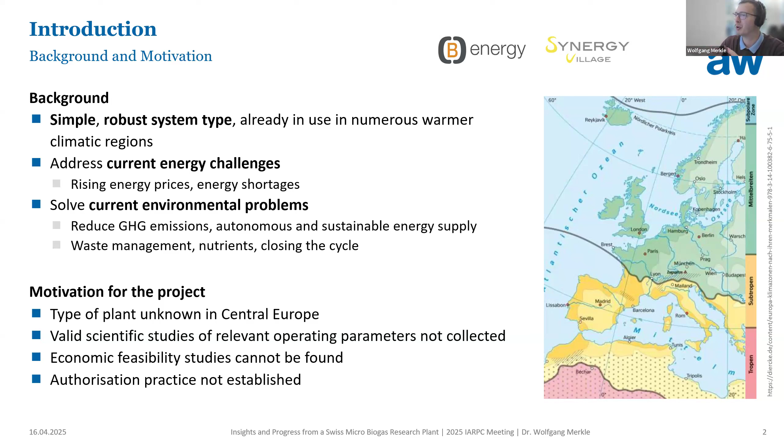So now the company is thinking about having one central station with mono incineration to burn all the sewage sludge, and then they're building big mountains of ash. At some point they will have a leaching process to get the phosphorus out of these mountains, but while the incineration plants exist, the leaching process is not done yet. So that's not really landfill, but it's still building hills and dealing with this later.

The motivation for us was that this kind of plant is already used in a lot of different warm countries, like China or Africa. But we don't know if we could use this kind of system in colder regions, like Central Europe - probably we have to adjust these systems.

What we also have is a lack of data. There are millions of these plants, but nobody is measuring anything - they just see if the burner is working or not. That's the only measurement equipment they have. They know the gas quality, if there's enough methane inside, but normally they're not measuring. That's why we want to have a scientific study to really measure different temperatures, pH, redox, gas amounts, gas quality, and all this stuff to do a balance later for the energy.

And for the economic feasibility studies, you also don't find a lot of information about that, especially in Central Europe, where there are none of these businesses.

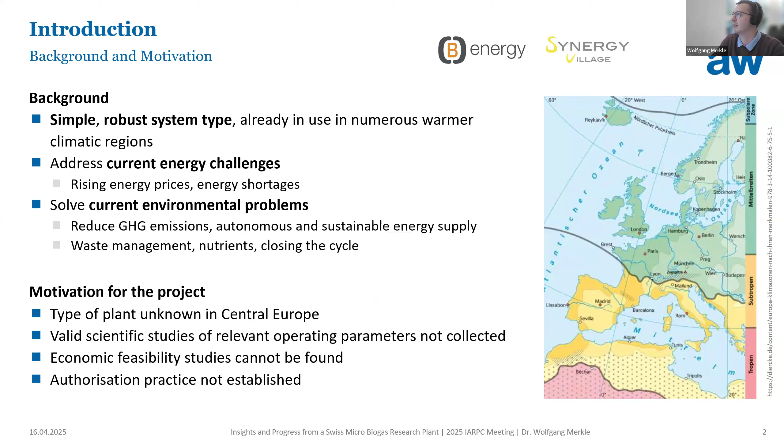And the big thing is, technically everything is possible, but for sure the authorization practice is always lagging behind, because when you don't have this kind of system yet, there's no law or regulation. It's always like this - first you have something new, and then the regulation comes later, because before they never had to deal with this kind of thing.

So this was the motivation, and what we want to do in this project, which runs for 2 years, is to analyze the performance once we operate these kinds of plants. Then also to measure the economic viability, and figure out the permission - what do I have to do to get this thing running, and what kind of offices I have to call, and who is deciding if I'm allowed to do this or not.

And for sure we also do some meta studies where we want to look at how we can use this kind of system for regions which are really far away from the grid - for example the Alpine region - and see what kind of possibility there is to use this kind of system. So these are, plus minus, the working packages we are dealing with.

So the first thing was to construct and plan such a thing. Then for sure the operation, which we're doing now for 200 days already. And for sure, when we did the construction, we had to adapt the normal system you can buy on the market to the conditions we have here, putting a lot of different measurement equipment inside to do the scientific research and also get practical experience - because when you're doing it scientifically, you would say, okay, you're feeding it three times a week, for example.

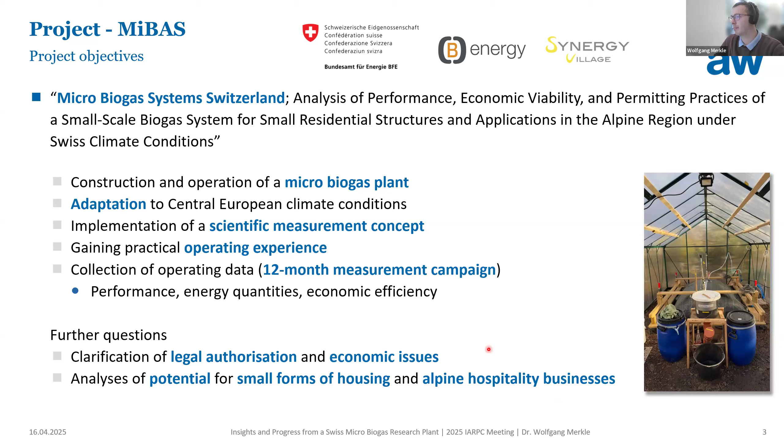The project started in December 2023, and we have different partners. We are from the Zurich University of Applied Sciences, Institute of Chemistry and Biotechnology, but we also have colleagues from another institute, Natural Resource Sciences. Then we have a company which is already selling this kind of biogas digester in Africa, B Energy. And then we have Synergy Village, where we installed the plant - that's a community where people live, including volunteers, many of whom can deal with this kind of biogas plant, which is why we placed it there. The whole project is funded by the Swiss Federal Office of Energy.

So to get an idea what we installed, here's an easy scheme of how it looks. First we want to characterize the substrate we're feeding - normally it's kitchen waste. We're not working with sewage sludge or similar; we're just using kitchen waste. For the mass balances, they have to weigh the substrate they put inside.

Every month we're doing organic dry matter content measurements, and we're doing the same with the digestate coming out, to see how much digestate is produced and what the quality is like, for fertilizing purposes later on.

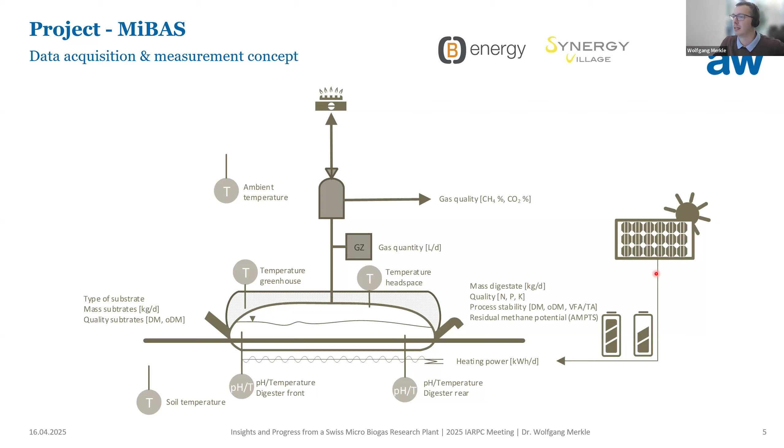And then we have two other measurement units where we can measure, just in case if we want to do a pre-treatment of the substrates which we put inside, for example mixing, cutting, or we have to hygienize them when, for example, you're using not just kitchen waste but other stuff. So there we also have measurements which you could do. That's just the easy scheme for this.

Let's say the biogas plant which we're using, we got from our project partner, B Energy. That's a former colleague of Hajo and me. She was doing her master's at the university, and she invented this called the biogas backpack. So not the biogas plant itself, but the biogas backpack.

She always thought, let's say in Africa, a lot of women have to just get things for cooking, fuels, normally like wood or something like this. So they spend a lot of time just getting wood to cook later on. She invented this biogas bag where she said, why can't they use biogas plants, let's say in a community, and then they have the gas bag, fill the gas bag, and then 1 cubic meter of gas you can cook probably 2 to 3 hours, and it's not heavy because 1 cubic meter is 1 kilogram, so easy to carry for even children. So that's what she invented.

But when you see this kind of biogas plants, you see normally they don't have any heating system because they don't have heating issues. So normally it's just a digester bag. And so we had to optimize it with reliable measurement, and for sure, because we are here in a colder region, heating and insulation systems.

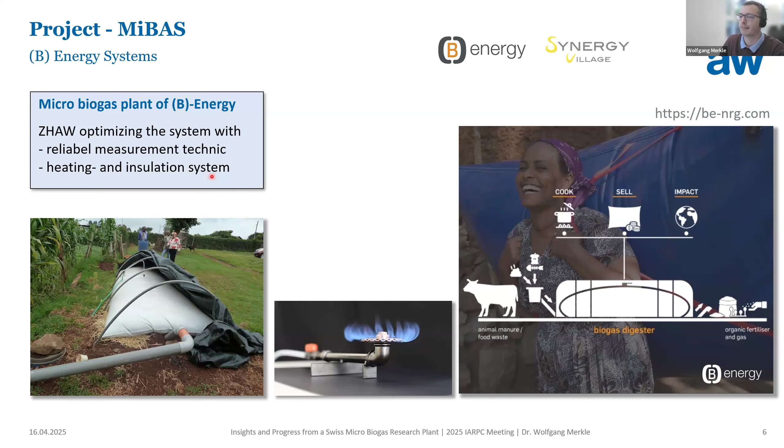And where we are, so probably some of you went already to Switzerland. Let's say we are located near Zurich. Our campus, the big campus, is in Winterthur. That's the headquarter campus, but we have another campus here in Wädenswil, where we are located on Zurich Lake. And on the other side of the lake is the Synergy Village, where we also installed the biogas plant. This means when I want to go to the biogas plant, I have to use a ship going to the other side of the lake, and then you can go there by train or by bike. So it's a nice way to go to work.

Let's say when there's something not working at the biogas plant, it's not a big deal. So you're just taking the nice ship, with mountains in the background, so it's not the worst way to go to work.

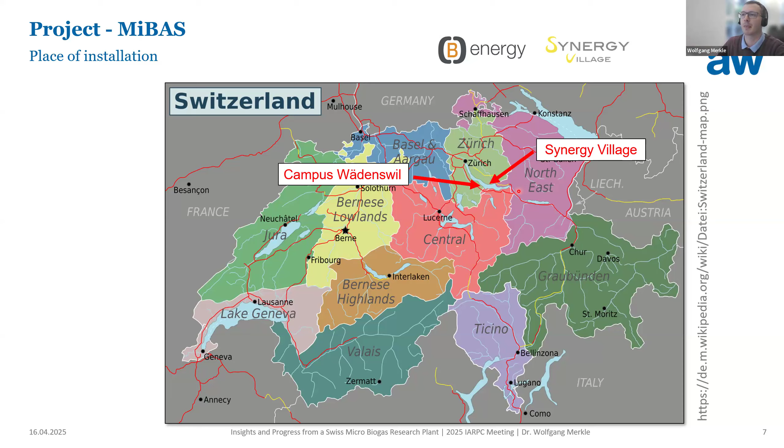So this Synergy Village is, let's say, a non-profit organization, and they are dealing with different kinds of things there. So they have a look on environmental impacts, and they have a lot of volunteers who are working for them.

And what they also have, I think they built it five to six years ago. They got a project and built their tiny house near their older farm. So they installed a tiny house where they're measuring, or producing energy. They're measuring all the energy they're using. Also the gray water gets treated. They have a toilet where they separate solids and liquids, and they also take the gray water later on to grow some crops on top of the building.

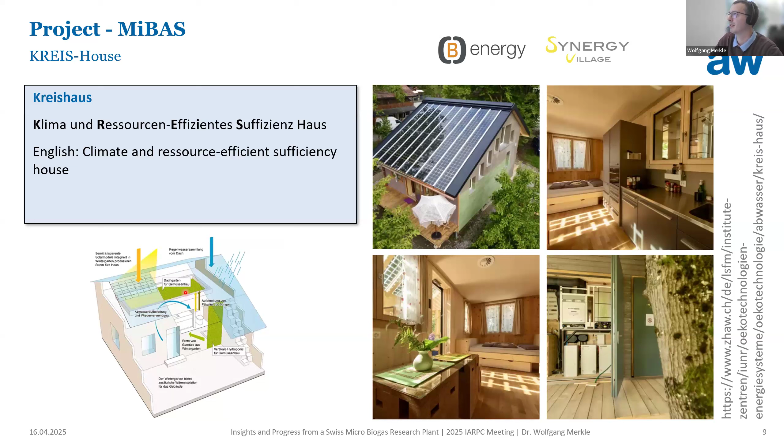So that's why we said it's probably the perfect place to install a biogas plant next to it, because they're already dealing with this kind of sustainable things.

And in the project, just for introduction, we also want to deal with, let's say later on, small apartments. So they're normally far away from sanitary facilities. So that's why probably they have to deal also somehow with this.

Where probably you could use this later on is probably winter gardens and natural building materials. They normally use recycled materials and nutrient recovery, which they also normally have to do in these houses. So they have organic waste they have to deal with. And normally they also need some kind of electricity, also heat.

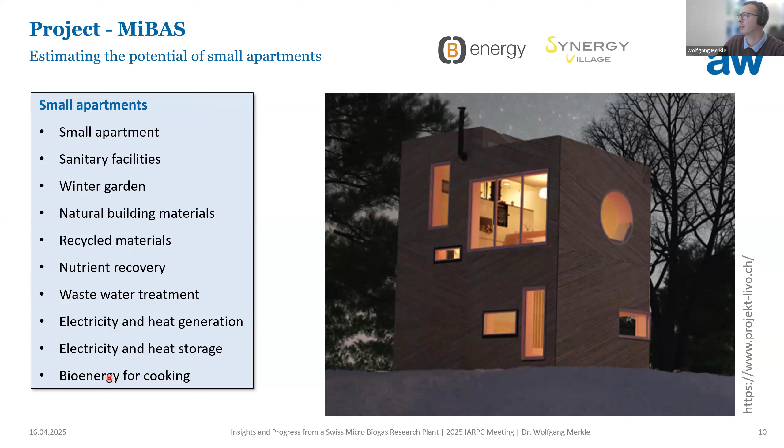So the question is probably whether this kind of small or micro biogas plant can give them some heat or electrical energy, or at least energy for cooking. That's normally the simplest way - just burn it with a cooker, and then you produce your food.

The other thing to have a look at is these alpine inns, far away from the grid. Normally it's cold there in winter and warm in summer. With this kind of inn, some of them only operate in summer and are not used in winter. So the question is, with this kind of biogas digester, what do you do when you're only operating for half a year, and how do you start it up again in summer? That's a big task for us. Normally they're far away from the grid and need energy somehow, at least for cooking, since they're living there. So these are probably good places to use these micro biogas plants.

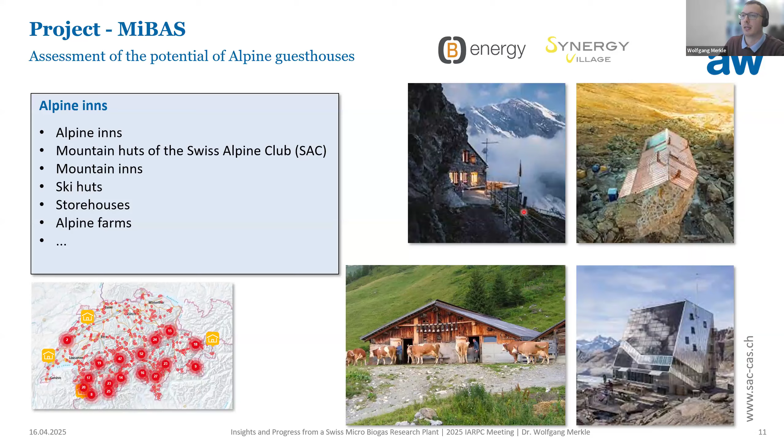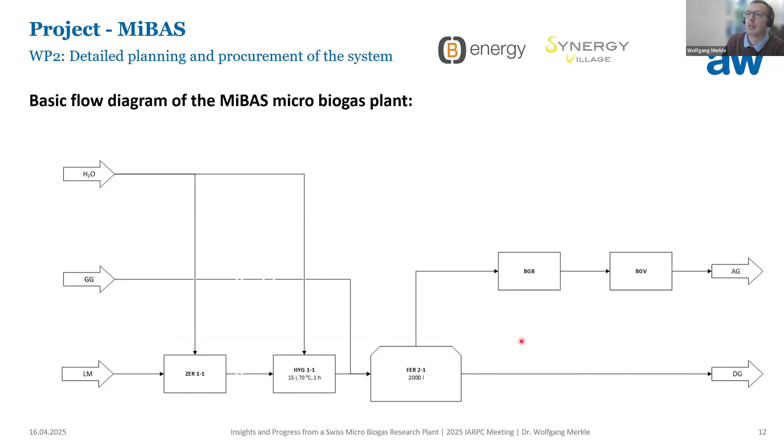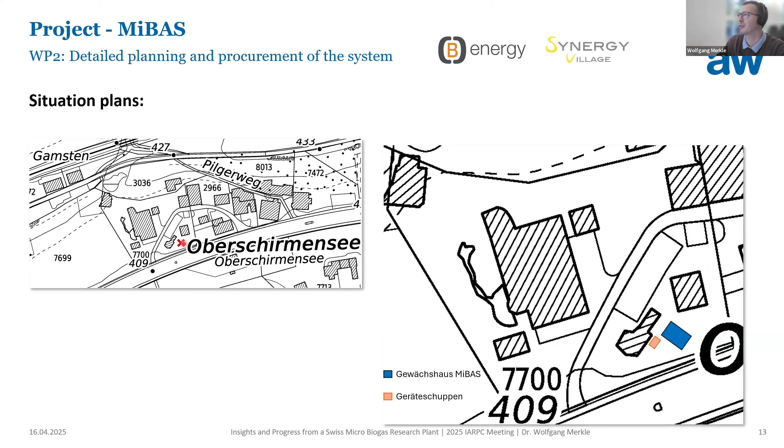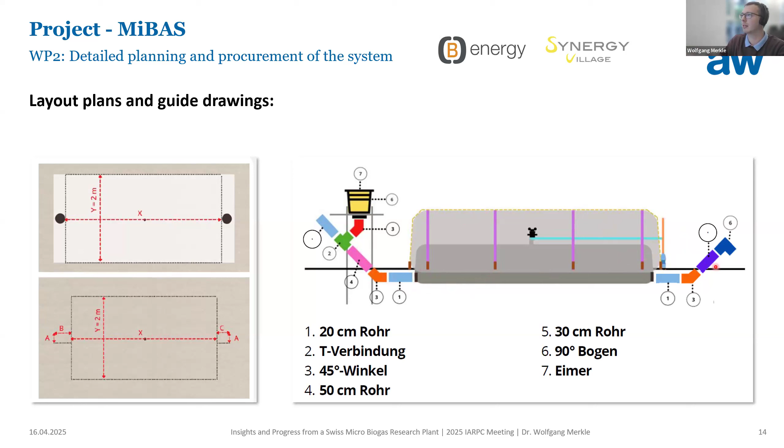That's the layout of what you normally get when you buy this kind of biogas plant. Normally what they give you is a digester bag, in different sizes from 2 to 5 cubic meters, that's what she has. Normally all the piping isn't sold with it, because they say you can buy it locally in shops next to you — why should they transport it to you? That's also what they do in Africa: she just sends the biogas digester, and all the piping can be sourced locally, just to reduce the amount of things that need to be transported.

What we had to do, we'll talk about later, was adjust it somehow, because normally this biogas plant isn't in a greenhouse, and normally you don't need a wooden hut either. The wooden hut was for us to put all the controllers we need so they don't get wet, and to store things. And the greenhouse lets us work there even in winter or when it's raining, so we can still work inside without getting wet.

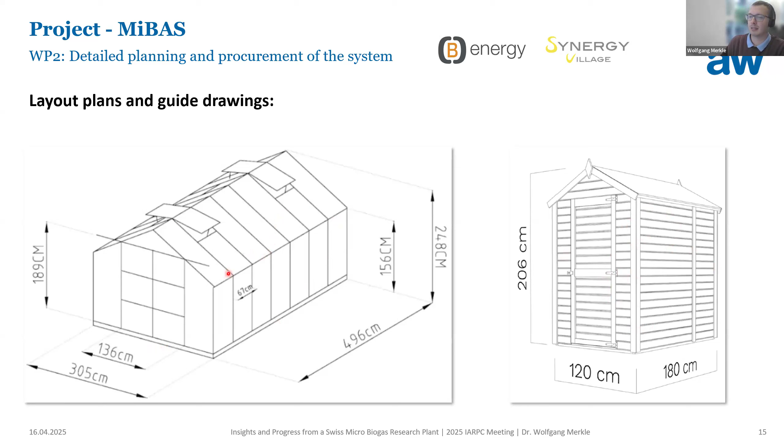For the automation, we thought about how to do it and used a really cheap automation possibility. You're probably familiar with Raspberry Pi controllers — there's a company where you can buy more industrial versions of the Raspberry Pi. You can put it into a control cabinet and then add different kinds of modules, for example for analog signals, digital signals, or to deal with and control heating systems.

We used the software Node-RED — some of you probably know this. It's software installed on the Raspberry Pi that lets you easily generate and do the automation. You don't have to do hard coding, it's just modules you combine, and that's it, easy. We also used an Influx database, because they already had it set up for the tiny house, so we just added our data to be stored there too.

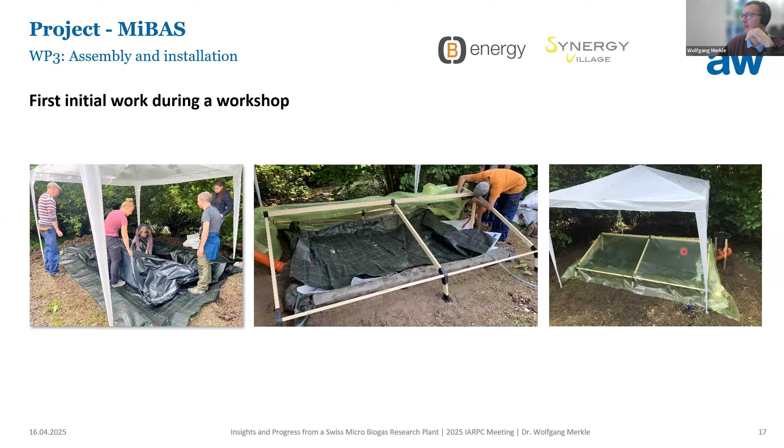So normally when you just buy it, it looks like this. We did a lot of adjustments. First, we did the surrounding area, cut back some trees to have more space. Then we dug a bigger hole, installed the heating cable below, and did the insulation there too. Then we had this wooden hut where we put all the electrical stuff inside, the controlling units.

And then on top of it we built this greenhouse. This is how it looks in autumn, and this is how it looks in winter. For sure these greenhouses aren't made for Swiss conditions when you buy them. That's why we had to make it stronger, especially the roof, because normally it's just plexiglass, and that's really thin, I think 3 to 4 millimeters.

So it's okay when it's dry snow just sliding down, but when you have wet snow sticking there, I went once and the roof was half collapsed, some things fell inside. That's when I said, okay, I can't manage with this anymore. That's why we had to put some wood there to make the roof stronger.

And here you see something we also bought, which we sometimes use and sometimes not. It's just a mixer you can buy for kitchens, I think for 7 liters, in case you want to cut some things up.

When we dealt with the heating system we got from this company, we realized this wasn't going to work. One issue was the power of the heating system, and the heating system was laying below the bag, meaning the connection to the liquid inside the reactor was really low. This means it's not efficient. So what we had to do was install another heating system.

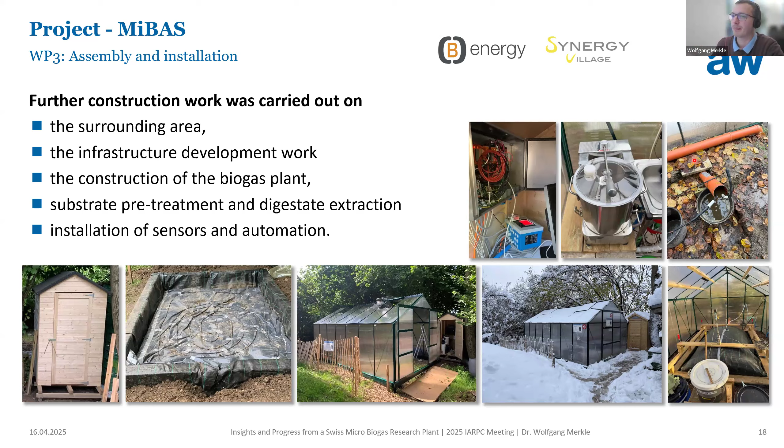Yeah, and then just some results. So we are not finished yet. Just to give you an overview of what we're doing and what we're measuring.

So these are, for example, the measurement of the pH. Let's say the front is the input, and the rear is the output. These are the two pH probes we have. At the beginning we had a pH of 8. First we did the testing with just water inside to see everything is gas tight. And then we just took liquid digestate from a biogas plant, a co-digestion biogas plant, and we inoculated with 1 cubic meter of this.

Then you saw at the beginning the pH was high, but because there was still a lot of water inside, pH decreased. And for sure you start with the feeding. Then later on, I think around here, we inoculated one more time with just 2 cubic meters of manure, because manure has a big buffer capacity, so then you don't have these problems when the acids are being generated.

What we're also measuring is the redox, because it's a combi electrode. You may know that when there's oxygen, normally the redox is positive. That's why at the beginning we measured positive millivolts. And then as it's getting more and more anaerobic, you see it reaches plus minus minus 300 millivolts at the end.

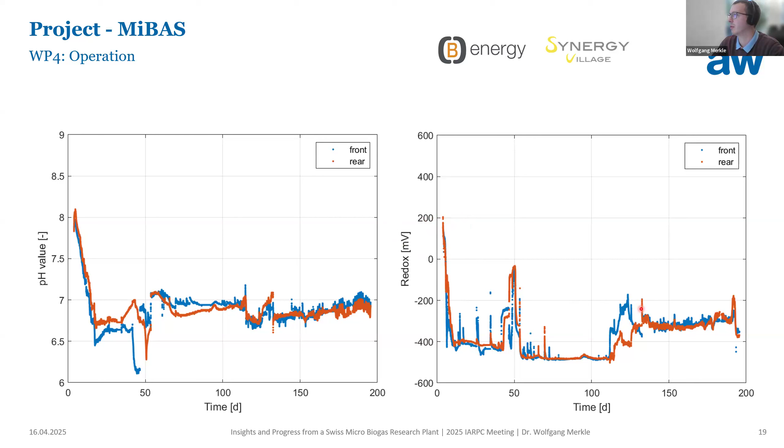Below or above the heating system, and also in the gas counters, because the gas counter works like this: there's water in the gas counter and it's turning, and we had to make sure it's not freezing in winter time, otherwise the gas measurement is not working. That's why we have a special heating system surrounded around this gas counter to make sure it has at least 6 degrees centigrade.

So even though it's fully automated, sometimes you have to, or you always have to take care of this. It's not fully automated always. You just always have to have a look, not every week, but you just check because otherwise it's not working.

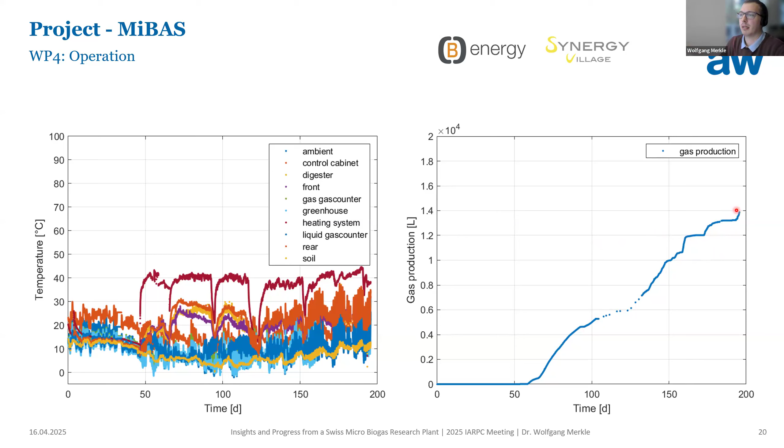That's from the results, which I can present you now. So let's say the plant is now operating. About 3 weeks ago, we handed over to the Synergy Village people, so now they are responsible for feeding it. At the beginning they weren't so strict in feeding, meaning nobody was really responsible, and when nobody's responsible the biogas plant gets no food. In the last 2 to 3 weeks, I think they only fed it 2 or 3 times, much less than we did before. So that's a lot of things you have to deal with which is not a technical challenge, but a social challenge.

What we still have to do is the laboratory analysis of the organic dry matter and dry matter. We also have a bachelor thesis dealing with methane potential tests and residual methane potential tests, taking samples from there. The question is that kitchen wastes are not homogeneous, since in January they're cooking different food than in summer or winter. So what is a representative sample? You can take a sample now, but in two more months it might be different food, which is why we're taking different kinds of samples. We also still have to do meta studies on these alpine inns.

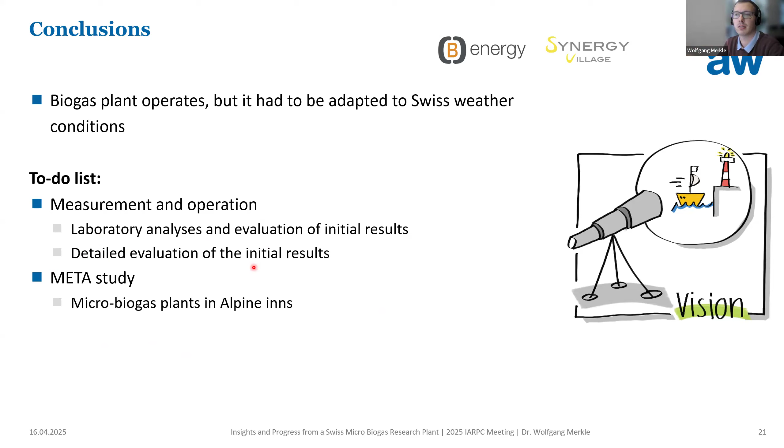Good. I don't know if Hajo is still there or not. I don't think so, he stepped out. Yep, he stepped out, yeah.

What he normally shows is this Swiss Army knife analogy for what biogas is for us. It's handy like a Swiss Army knife, and you can do a lot of things with it, which is what we normally promote, something every child would understand. Everybody knows a Swiss Army knife, and it's a tool for doing different things, and that's what we think about biogas too. It has the potential to treat different kinds of organic waste. We can produce fertilizers, energy, or other products. This means biogas is in the center of the so-called bioeconomy, there to treat different things. It's not always there to produce fancy new stuff, it's just to get rid of stuff which other processes produced. That's the task biogas has to do, which is why it's central to bioeconomy, dealing with all the side streams other processes have.

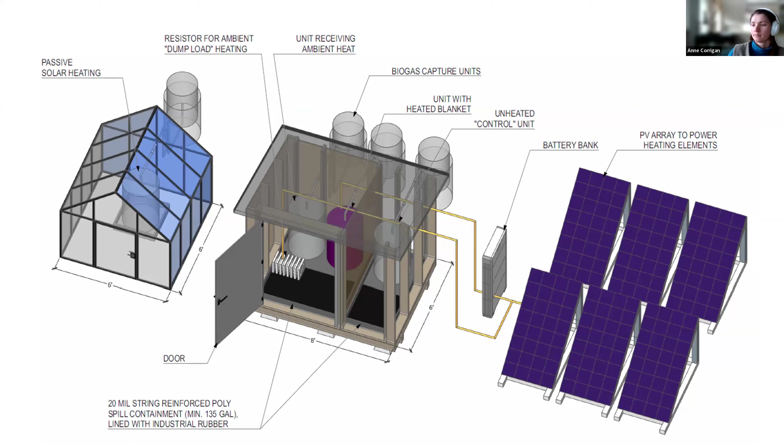This is the same thing but from another angle, to give you a sense of what is on site here. So last year we went through construction and we have all of this set up outside.

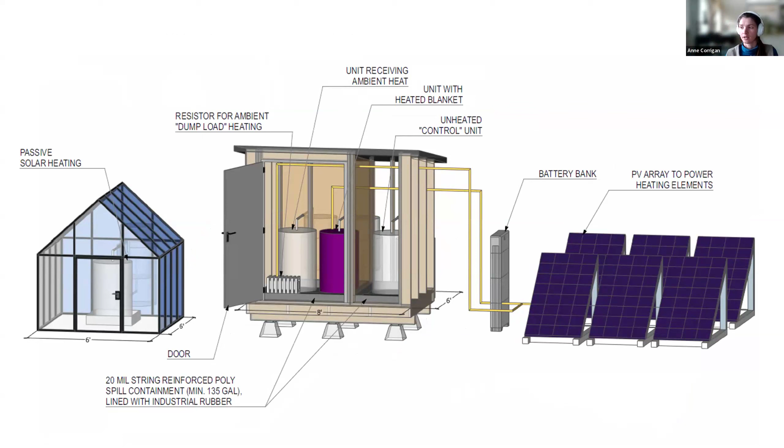But before I show you pictures of it on site, I wanted to take a closer look at the digester design itself. The drum on the right is where our digester will be filled. Synthetic feces is our planned feedstock, and that synthetic feces will be inoculated with samples from a lagoon in Alaska. It's not exactly our local lagoon, but it is a lagoon in Alaska. So from their anaerobic cells at that plant will come, and that's how we will do what is planned to be a batch inoculation for startup of these drums.

That is something I'll get to at the end for discussion, but this is kind of the overall view.

We've got a standpipe in the lid so we can pump out digestate, and we have probes and a feed port also in the lid. So all the penetrations of the digester are entirely within the lid, and that was just due to leaking concerns.

Our monitoring is shown here. We have 3 temperature probes within each drum: one at the bottom, one at the edge, and one at the core, mounted on that standpipe. That's to understand how much mixing is going on.

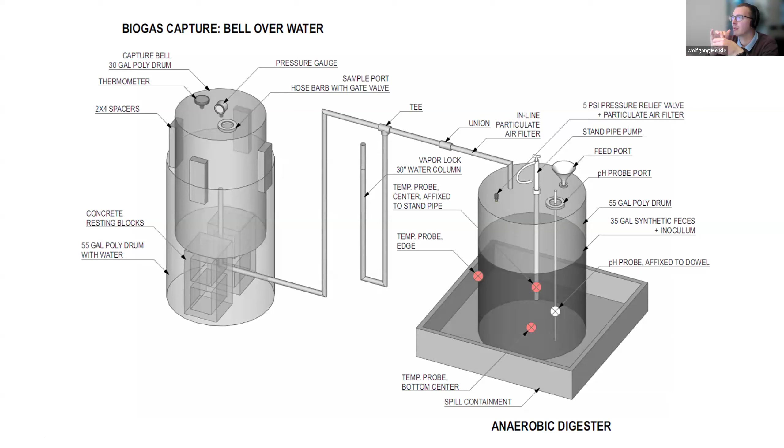Because I know from our small scale plants which we have in the lab, we did this with the pipe, because then you don't have to be 100% sure that it's always tight on the feeding, since it's just a really small surface where biogas can leave the reactor. Then probably you can think about having just a pipe to make sure you only have the surface where the liquid is, and not the whole liquid surface where all the gas can, by mistake, go out during operation. Because for sure it's always about technical things, but at the end it's just how you train the people, and you can never be sure if they're doing things right.

If there were, I think part of the reasoning was to minimize gas losses, worth emphasizing. I think the reason there isn't feed directly into this is if that were to get clogged and not mixed, what issues would that present?

But you don't have the problem, even if it's clogging, because it's open on top, and you can just take a stick and put it down in case it's clogging. You open it and then you can just use it, since it's a big diameter.

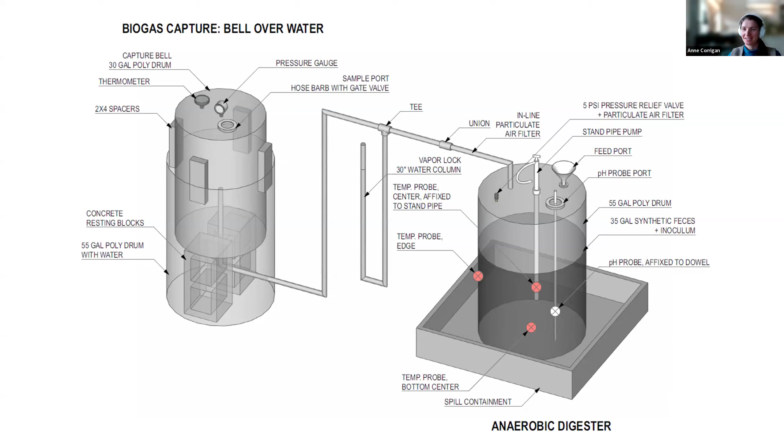We discussed the stick method, and our biosafety team didn't love the description of that, but okay, it's worth keeping track of things.

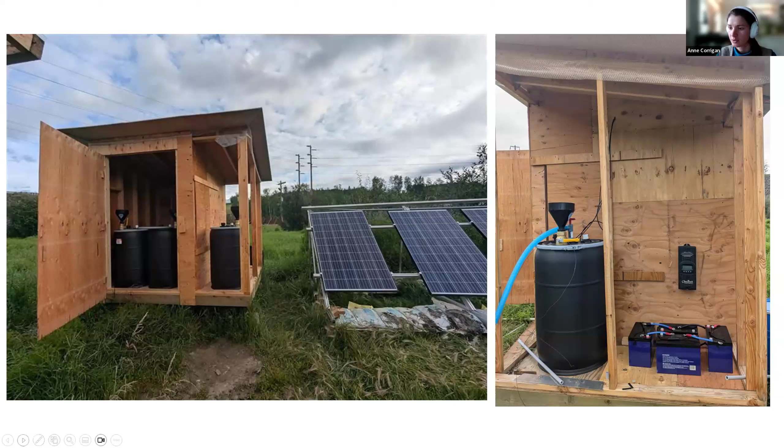For those who have been following closely, I'll talk about the power system briefly. I actually probably won't spend too much time on this. Essentially, it's a PV array with that battery system I mentioned.

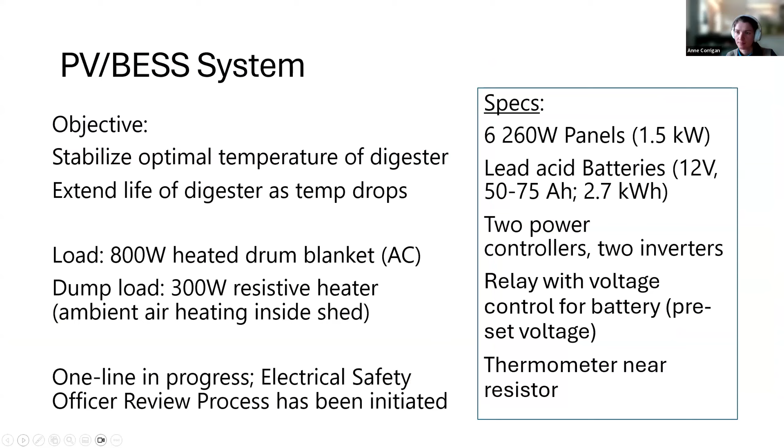So this is something we actually did need to think about critically, as we were wondering if there would be disturbances to the system, and just keeping track of our instrumentation, conduit, and pipes.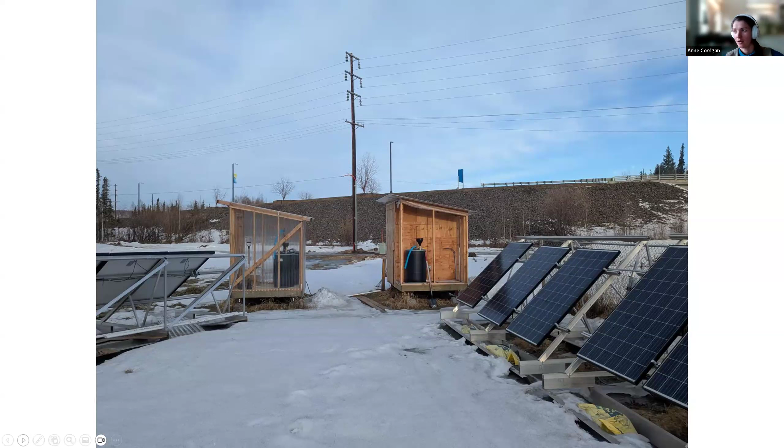So the next step is going to be May, June startup. Breakup is what we call when the ice all breaks up and flows out of the rivers, and the drum has also broken up, where we have now mostly liquid water again. We'll be able to dump that out in preparation for loading, and our plan is sometime in May or June.

The lagoon is also experiencing breakup, and they expect operation to begin in late May. So we're debating when exactly that's going to happen, matching up when's the best opportunity for success with when we're logistically going to be prepared for our greatest chances of success on site.

Alex? So sounds like you had monitoring stuff in place, and you were monitoring temperatures and stuff. So you have data from the empty facility or whatever, which is pretty interesting, and that will help, I think. So you have that already, right?

Yeah, so we didn't monitor throughout the winter. We monitored for about a month or two, August to September, which is the anticipated digester decline—when is that going to happen in the course of our year and our warm months. So at the end of last fall we filled those 4 systems with water and made sure our monitoring equipment worked, so we have temperature data over that time, which could be informative for estimating, anticipating, and preparing for late season monitoring this coming year.

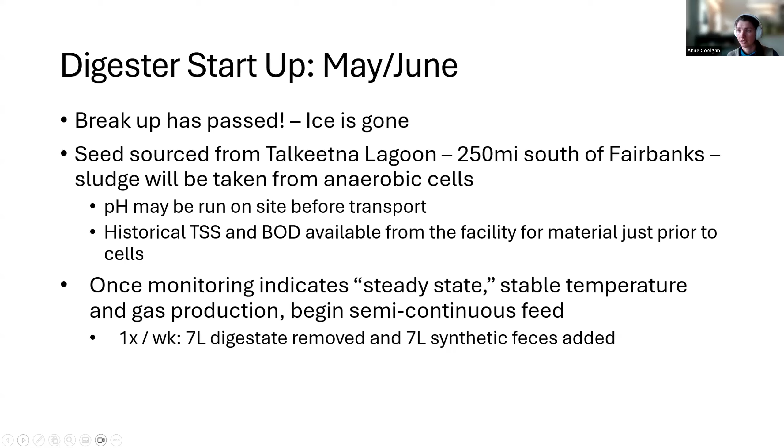So yeah, this is the current plan as we have structured it. Now my head hasn't been quite as in this project lately because it was hibernation mode, and so we're reevaluating—this is the plan we've sketched out. Before we move forward with it, are there changes we should make based on what we've learned, based on what others have learned in the meantime? Because the biggest focus is around the feeding and startup, since we really want to maximize our chances for success. This is an overview of the data collection.

We can talk more about that later, but the more burning questions right now are around the ratio at startup. Originally, Max had the first idea of just one batch - Max is the other EPA colleague working on this project with Margaret and I. Essentially fill it full and inoculate it once, let it sit and develop residency before starting to feed. I think, Nate, when you visited Fairbanks, we also discussed maybe we should rethink that ratio, because at one point we were talking about 5 gallons of seed to 30 gallons of synthetic feces at startup, and that just might be overwhelming. Moving towards a 1-to-1 ratio might be a better plan of action, which means we have a far smaller volume in each of the drums to begin with - a whole bunch of headspace. Then based on how that goes as the bacteria establish residency, we'd look at feeding. So it'll take much longer to get to what we anticipated as full operating volume of the drums.

I think that's kind of the biggest immediate question I want to stop on to get feedback from the group.